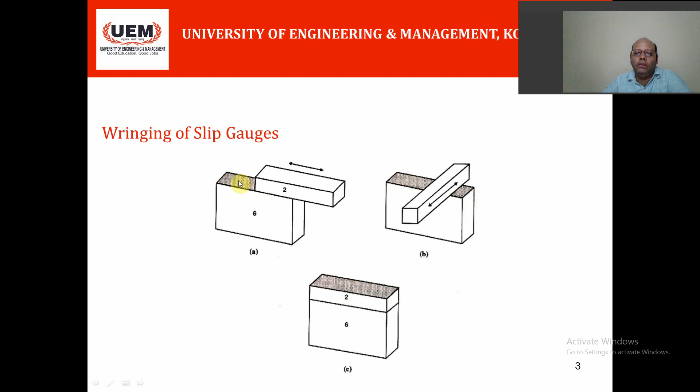Now after that, with this pressure, you have to rotate the slip gauges 90 degrees, then a total of 180 degrees, such that they will join due to the molecular adhesion forces. And if there is any dirt, any air bubbles, or any surface impurity, then molecular adhesion will not happen. That is why these faces are made so smooth, with a very fine surface finish for these slip gauge faces.

Now another method is that you can wring the slip gauges with this method. Directly at 90 degrees, you have to bring the slip gauges up to the middle position, and then rotate with pressure from below and from above, and it will join. And for dismantling, when you want to open the slip gauges again, you have to apply the same process but in the opposite direction.

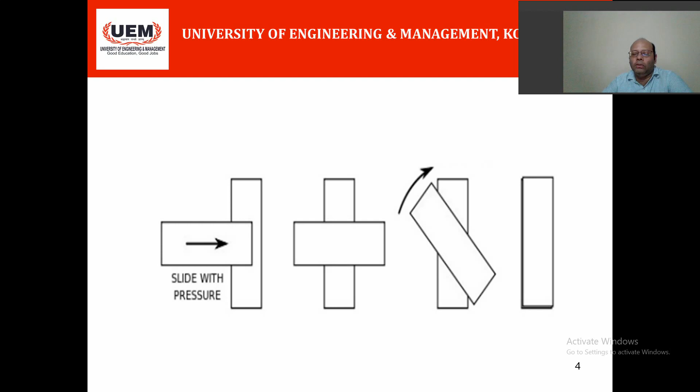So this is why we need wringing. We have to remember something about the slip gauge: always start with the last decimal place, then take the subsequent decimal places, and the minimum number of slip gauges should be used, otherwise there will be cumulative error. However small this error may be, when you wring two slip gauges, there is a small gap between them, and it will lead to cumulative error. That is why you should keep the number of slip gauges as small as possible.

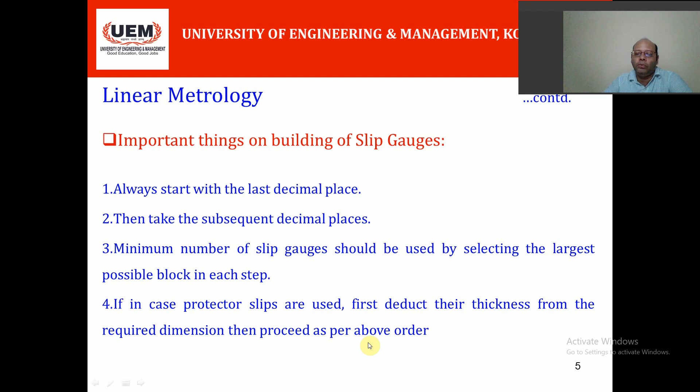If protector slips are used, first deduct their thickness from the required dimension, then proceed as per the above order. Now here again I am showing this, because I am going to discuss some numerical problems on slip gauges, that is tutorial 1 and tutorial 2.

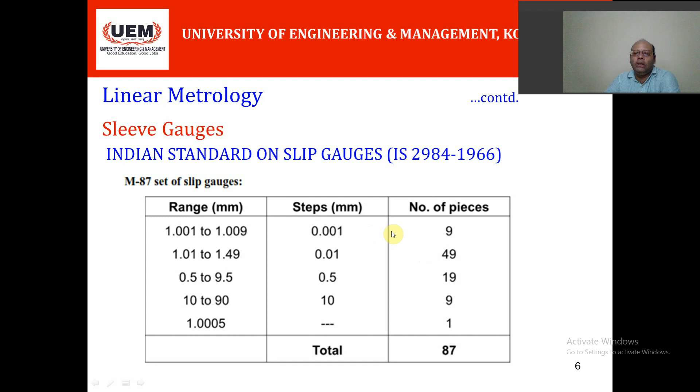In these Indian standard slip gauges, that is IS 2984 1966, there are 87 slip gauges. One may remember them, otherwise this table will be given, and there is another M112 set of slip gauges. In addition, some sets also contain protector slips that are 2.5 millimeter thick and are made from a hard wear-resistant material such as tungsten carbide.

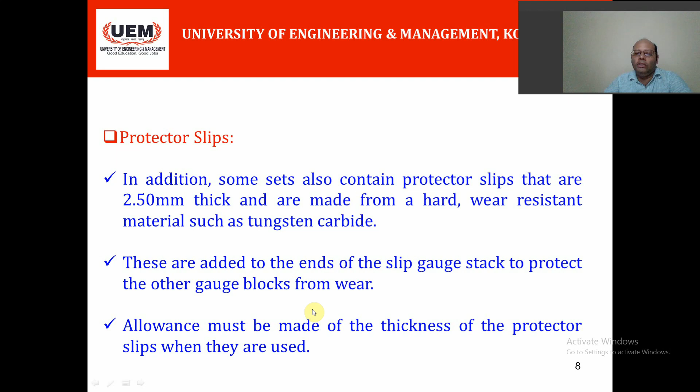These are added to the ends of the slip gauge stack to protect the other slip gauge blocks from wear. I have already discussed why protector slip gauges are used. Protector slips are used to avoid wear of the slip gauges, because these are very precise and very costly instruments. Allowance must be made for the thickness of the protector slips when they are used.